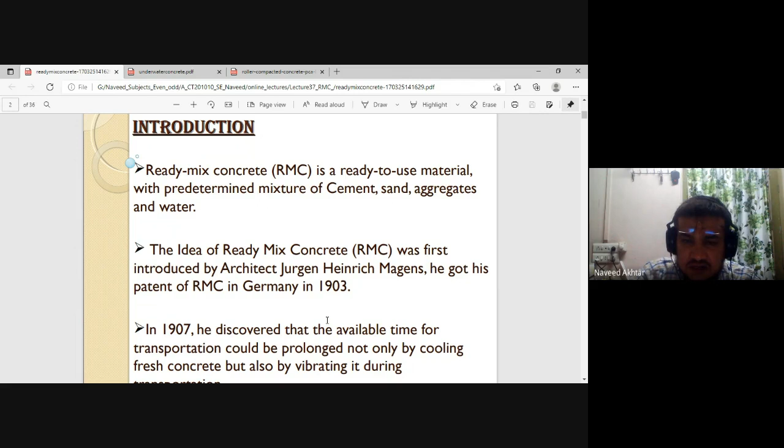Ready to use materials with a predetermined mixture of cement, sand, aggregates, and water. These are mixed at the ready mix plant situated at the factory or some other location, and then we transfer the material through the transit mixer to the site. That is nothing but the ready mix plant. In general terms, you say the RMC plant.

It was first introduced by the architect Jürgen Heinrich Magens. He got his patent of RMC in Germany in 1903.

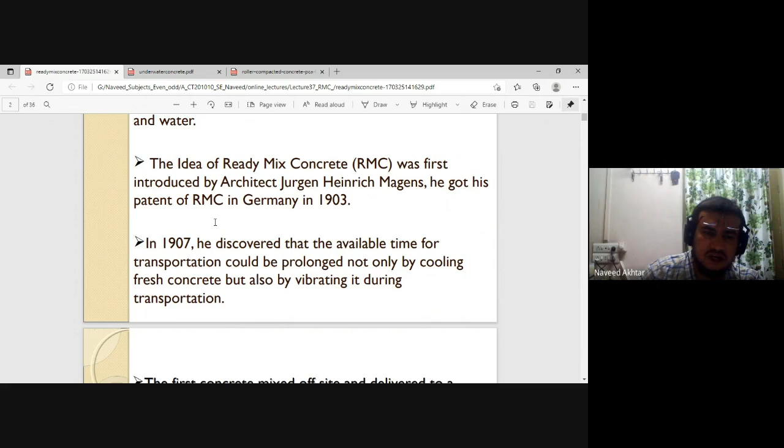In urban areas, in Malegaon also there is an RMC plant. You can also see in our 11,000 houses made on the bank of the river Girna. When we go toward Malde, there are houses, and there is the RMC plant. They are prepared for their continuous use of concrete.

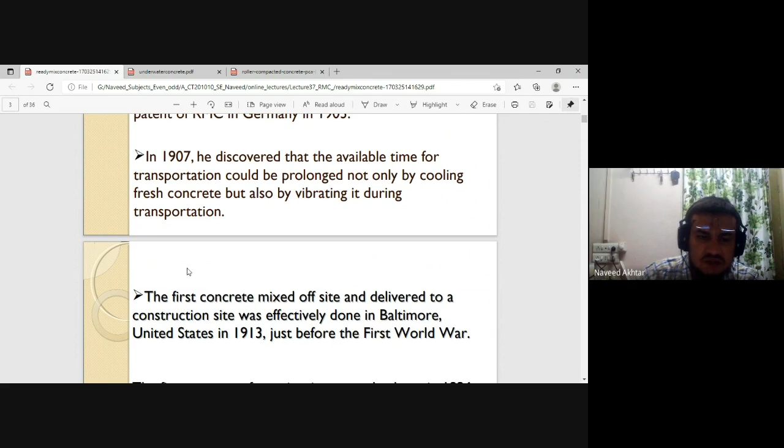In 1907, it was discovered that the available time for transportation could be prolonged not only by cooling fresh concrete but also by vibrating it during transportation. Transferring concrete is a very tough job, because once water is introduced into the mixer, the concrete starts setting. That's why continuous vibration or mixing is required, or a delay in setting time is required for RMC concrete.

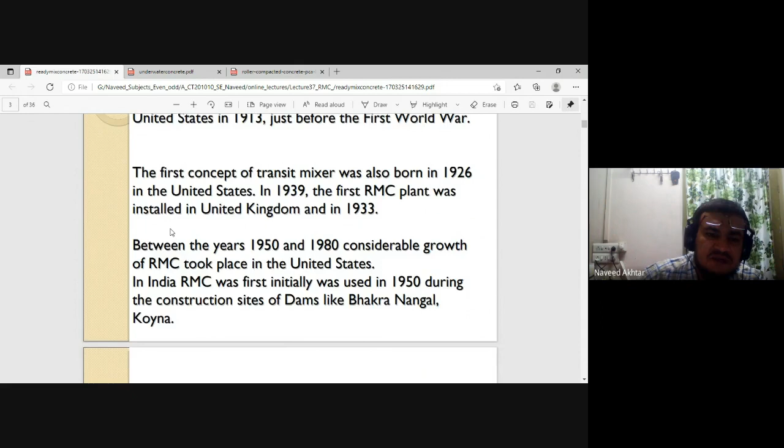Thus, the first concrete mix off-site and delivered to the construction site was effectively done in Baltimore, United States in 1913, just before the First World War. The first concept of the transit mixer was also born in 1926 in the United States. The first RMC plant was installed in the United Kingdom in 1933. Between 1950 and 1980, considerable growth of RMC took place in the United States, and in India, RMC was initially used in 1950 during the construction of dams like Bhakra Nangal, Koyna, etc.

The increasing availability of special transport vehicles supplied by the new and fast-growing automobile industry played a positive role in the development of the RMC industry.

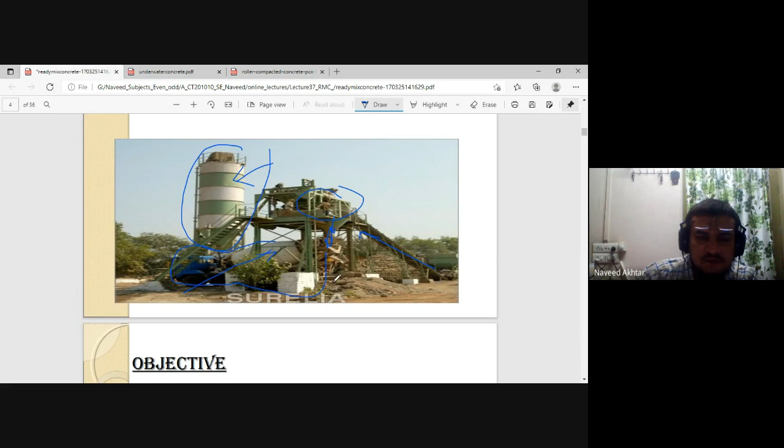So you can see here is the batching plant, and you can see the conveyor belts are there from the hoppers. This is the mixer where all the ingredients are mixed, and then through the hopper it is transferred to the vehicle. You can see this is the mixer vehicle, and this white colored one is your transit mixer. This hopper, the inverted cone hopper, is nothing but storage for your cement. So this is the RMC plant, in general.

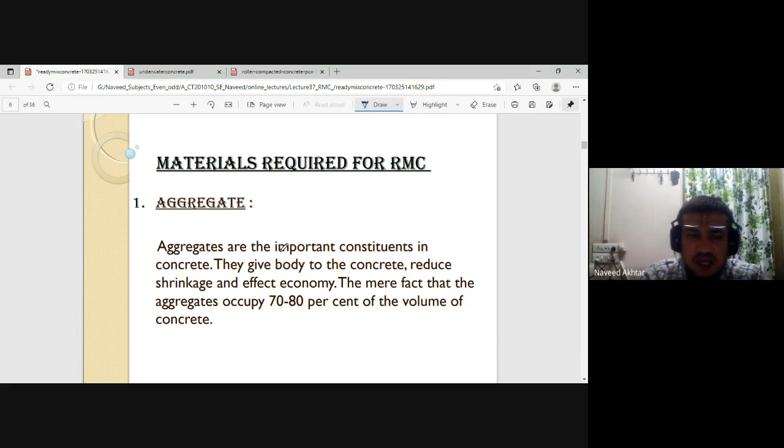To get better quality concrete, to eliminate the storage space for basic material at the site, and also to hire or procure plant and machinery directly, we are taking ready mix concrete from the factory. That's why RMC is given a lot of weightage, because storage of material at the site is required in large quantity when going for concreting. The material required for RMC is generally aggregate, as 70 to 80% of the volume of concrete mass is aggregate.

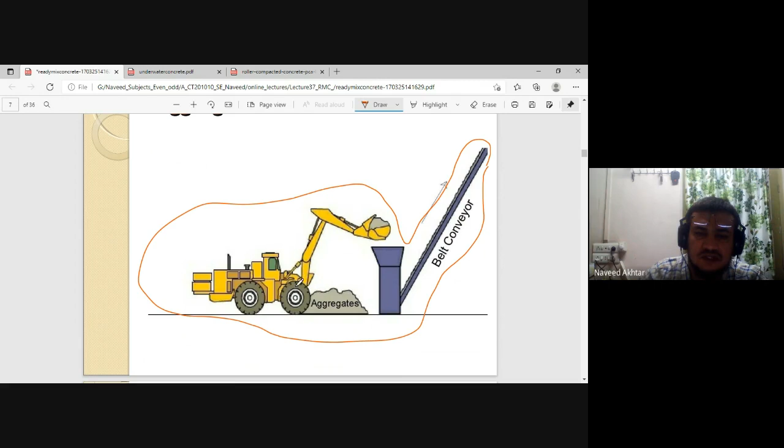This aggregate can be transferred to the conveyor belt to lift it, and then it is sent to the hopper like this. This is the aggregate, and aggregates are divided into two categories: coarse aggregate and fine aggregate. Sometimes, due to the shortage of natural fine aggregate, we are also using manufactured fine aggregate.

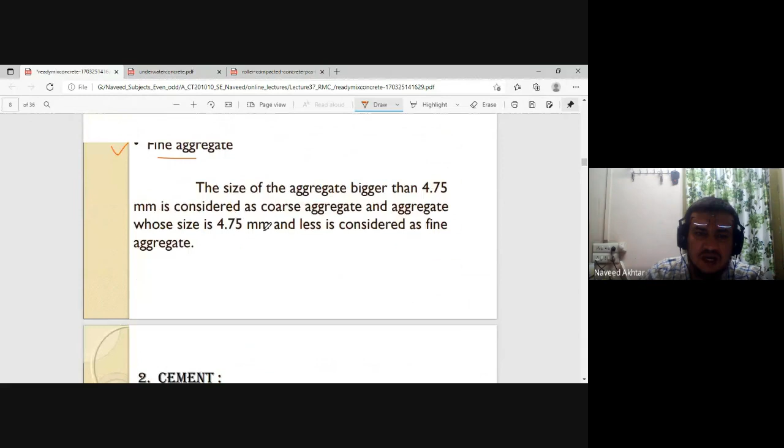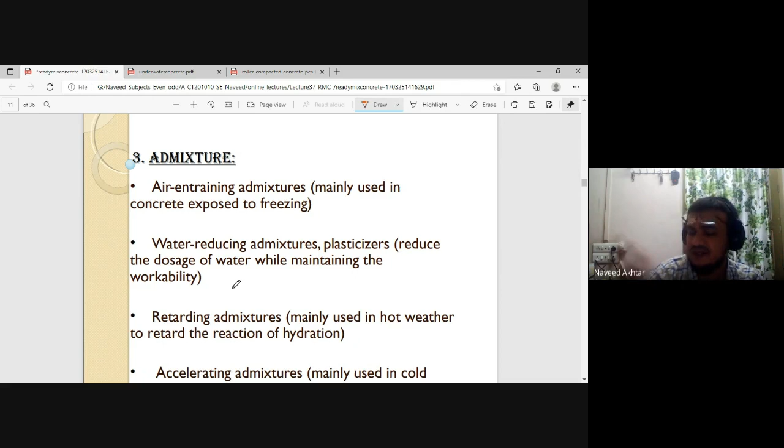Likewise, all the material is supplied to the mixer, and the capacity of the mixer is based on how much concrete it is preparing per hour. If the capacity of the mixer is CP30, it means it is producing 30 cubic meters per hour. Similarly, many such types of plants are there, 15 cubic meters per hour, 60 cubic meters per hour, and many such types.

So these ingredients, the basic ingredients, we have already studied earlier. These are the cementitious materials. Fly ash is also sometimes used because the delayed strength of fly ash is more compared to cement. So early age strength we gain more from OPC cement, but with PPC cement, the cement containing fly ash, or if you are partially replacing cement with fly ash, you also get a good result in later age strength of your concrete.

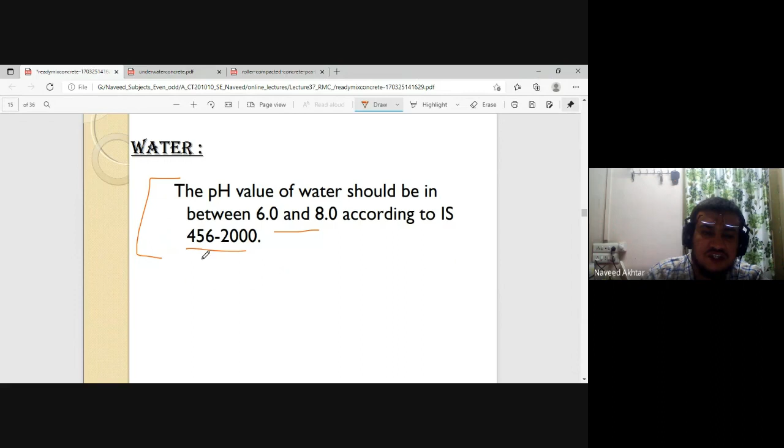Then water is required. The water should have a pH between 6 to 8 according to IS 456, and it should be free from contamination and particulate matter. These are all cementitious materials. Already we studied in unit one, rice husk ash - these are also very fine particles, finer than cement, and they are used to enhance the fresh state and hardened state properties of concrete.

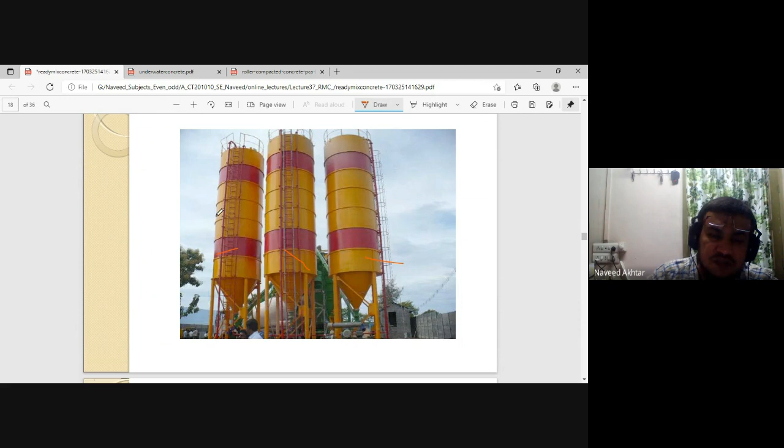So these are the silos where the cementitious materials are stored. You can see silo one, two, three - maybe different types of cement, like RHC rapid hardening cement, low heat cement, ordinary Portland cement, and Portland Pozzolana cement. So different hoppers are there for different cementitious materials. Sometimes if you are using fly ash as cement replacement, you can use that hopper, and through this hopper, the material is supplied through pipes to the mixer.

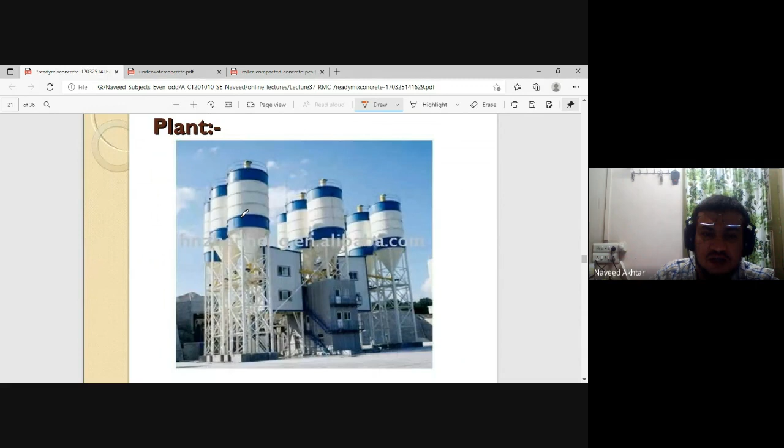So all these show how the aggregate is supplied, through the conveyor belt, then mixing takes place, and then transportation is done. There are many such batching plants - manual batching plants, somewhere semi-automatic batching plants, and automatic batching plants. These are different types of batching plants used for the ready mix production of RMC, that is ready mix concrete.

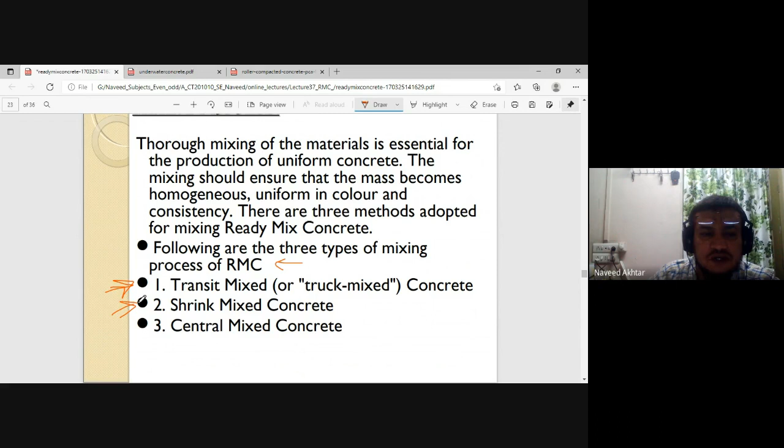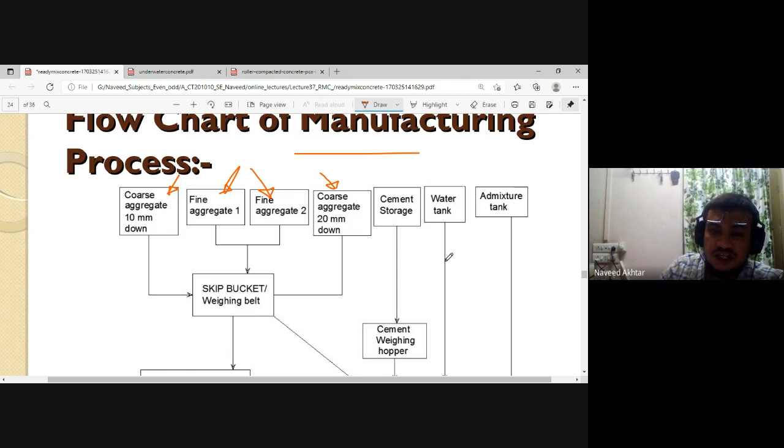Here it is very clear that the coarse aggregate and fine aggregate are stockpiled. Stockpile one, the coarse aggregate; stockpile two is divided into two parts, fine aggregate one and fine aggregate two. Then coarse aggregate also has another stockpile with 20mm and less than 20mm aggregate, and cement storage. Also the water tank and admixture storage are there, and then all this material is supplied to the mixer for mixing of the concrete, and the ready mix concrete is ready for discharge into the transit mixer to be transported to the construction site.

So then, for the fresh concrete, a sample is taken for testing, for the compressive strength test. See how the mixing process is done.

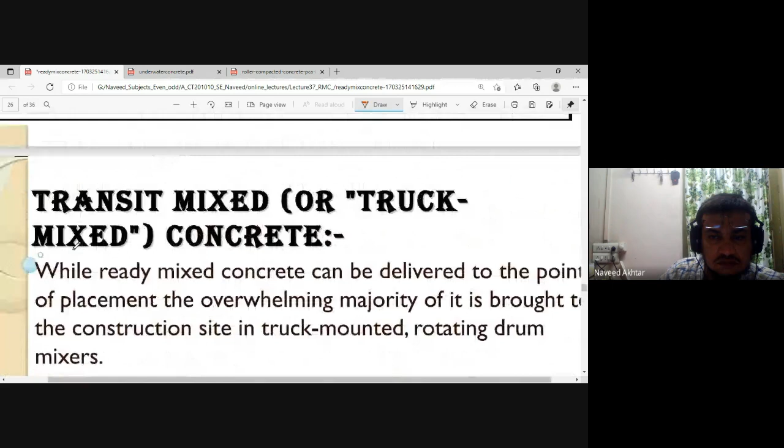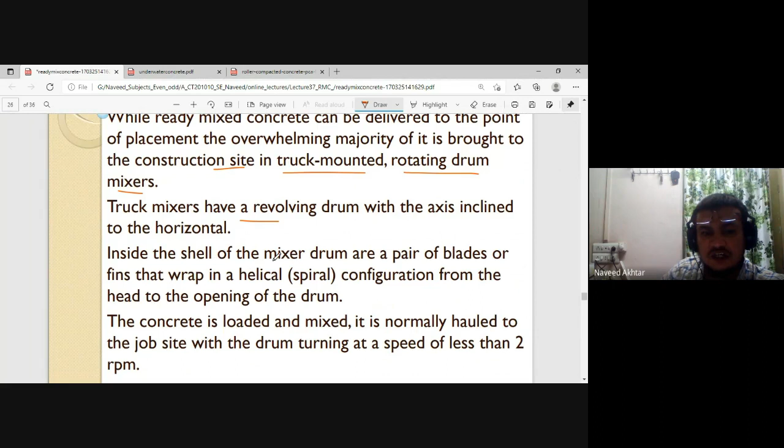While the ready-mix concrete is delivered to the point of placement, the overwhelming majority of it is brought to the construction site in a truck-mounted rotating drum mixer, and that rotating drum mixer is called a truck mixer, also called a transit mixer. Inside the shell of the mixer drum are a pair of blades that rotate, and the mixing of concrete is done. So you can see this is the truck mixer, the transit mixer, also called the transit mixer.

So this drum rotates clockwise and anti-clockwise. If it rotates clockwise, it is doing the mixing, and if it rotates anti-clockwise, it will discharge the concrete through the chute.

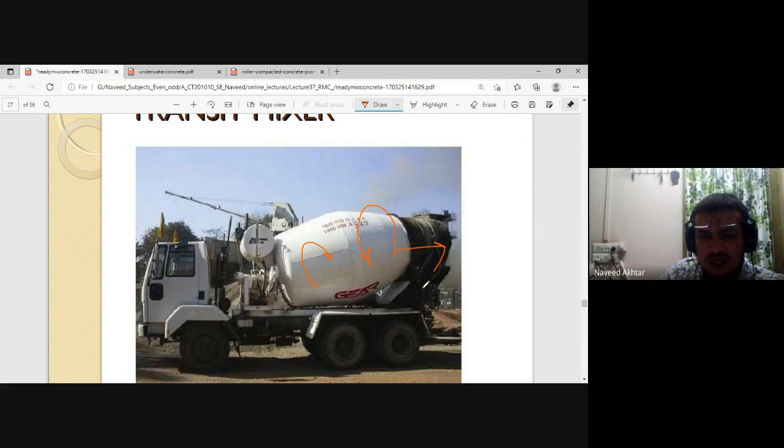So likewise, you can see this is RMC, ready-mix concrete, produced and transferred to the site.

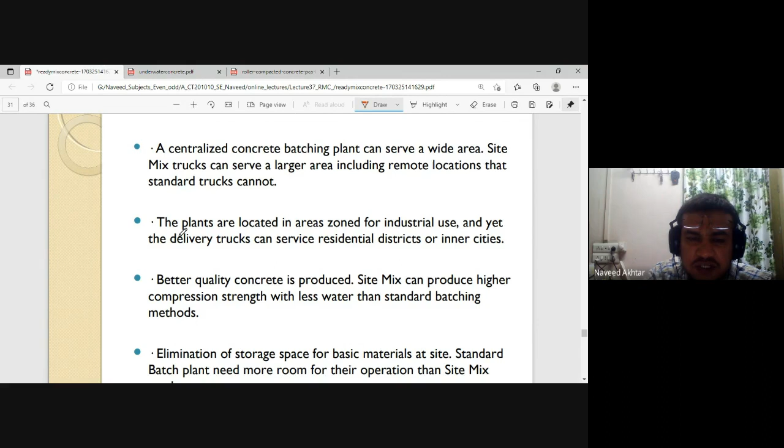Better concrete is produced; site mixing can produce higher compression strength with less water than standard batching methods. Elimination of storage space for basic materials at site. Standard batching plants need more room for their operation than site mix trucks. So these are the merits and benefits of RMC concrete.

Okay, very poor attendance today.

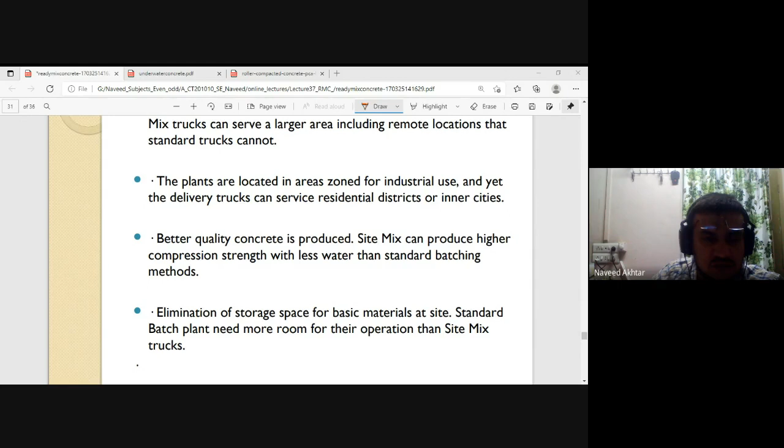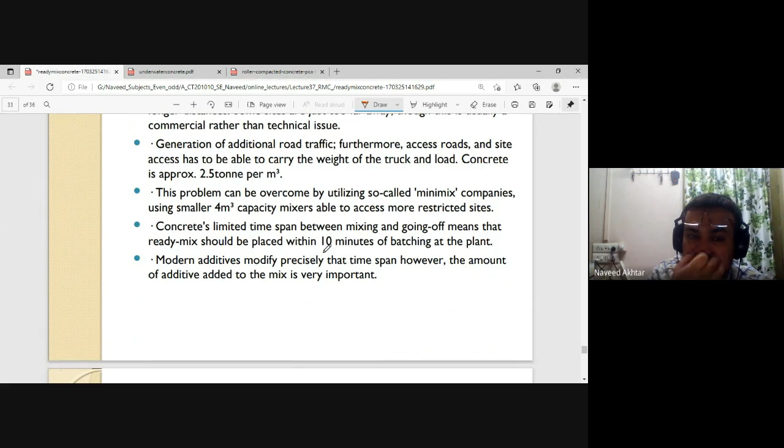Generation of additional road traffic. Furthermore, access roads and site accessibility have to be able to carry the weight of the truck and load. Concrete is approximately 2.5 tons per cubic meter, so that is a problem. If there is traffic, it should be discharged on time, otherwise it will be harmful for the truck, and the concrete is wasted.

The concrete's limited time span between mixing and going off means ready mix should be placed within 10 minutes of batching at the plant. So it is a very short time nowadays. If you are using a retarder, then 30 or sometimes 40 minutes is also suitable, and modern additives modify the time span precisely. However, the amount of additive mixed is very important.

This is all about your RMC plant, that is ready mix concrete.

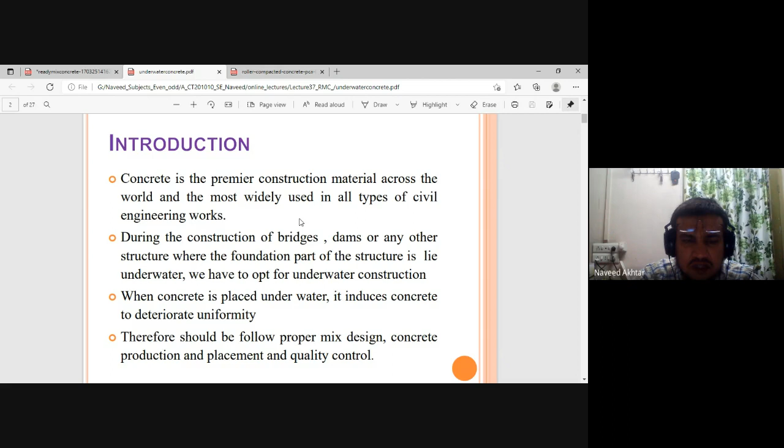Now the second technique is underwater concreting, a special condition where concreting can be done in water. Concrete is the premier construction material across the world, and is mostly used in all types of civil engineering works after water. So during the construction of bridges, dams, or any other structure where the foundation part lies underwater, we have to opt for underwater construction or underwater concreting.

When concrete is placed underwater, it reduces uniformity of the concrete. Therefore, proper mix design, concrete production and placement, and quality control is required very rigorously, because concreting underwater will hamper the properties of your concrete.

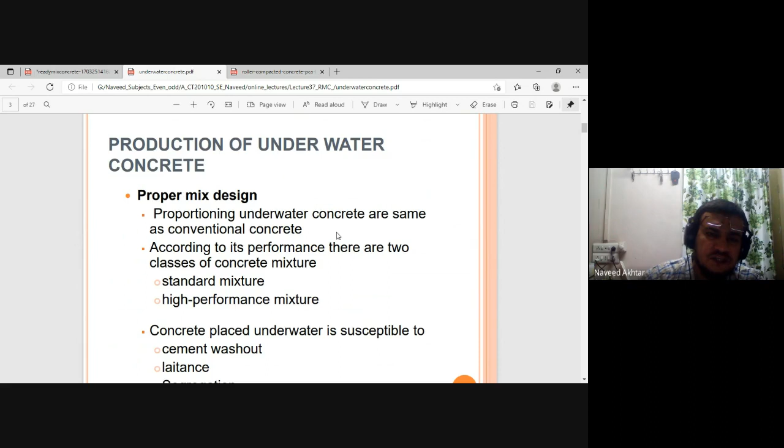So proper mix design should be done, and when placing concrete underwater, it may be susceptible to cement washout, laitance, or segregation. All these effects may occur, and should be avoided when doing concreting underwater.

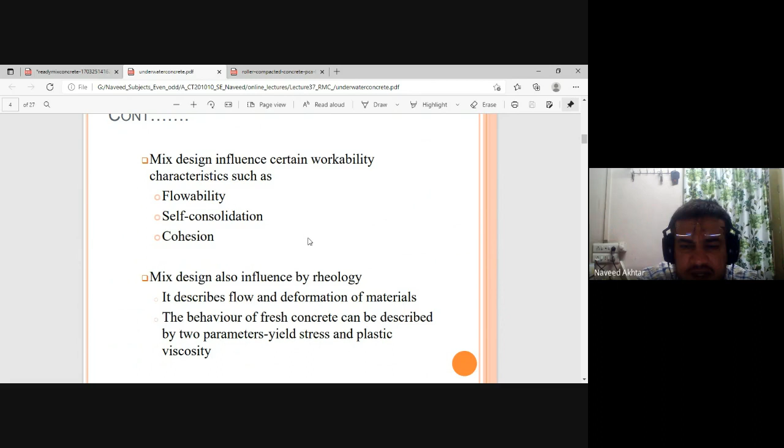Mix design influences certain characteristics such as flowability, self-consolidation, cohesion, etc. Mix design is also influenced by rheology. Rheology means the workability properties of the material; it describes the flow and deformation of material. The behavior of fresh concrete can be described by two parameters: yield stress and plastic viscosity.

Water content is an important factor affecting the rheology of concrete. Water content in a mixture can be classified into two categories: water absorbed in the aggregate and free water.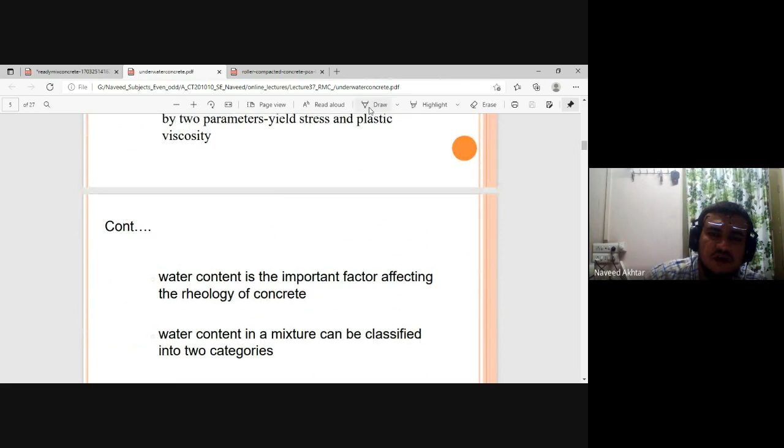There are many methods of placing concrete underwater. The first one is the Tremie method, then the pump method for pumping concrete - we have seen pumps in the equipment part in the previous class - and toggle bags or bag work. These are the different methods to place concrete underwater.

Tremie is a watertight pipe, generally of 250 mm diameter, with a funnel-shaped hopper at the top upper end, and a loose plug at the bottom where the concrete is deposited. It is supported on a working platform above the water level, and through it the concreting is done.

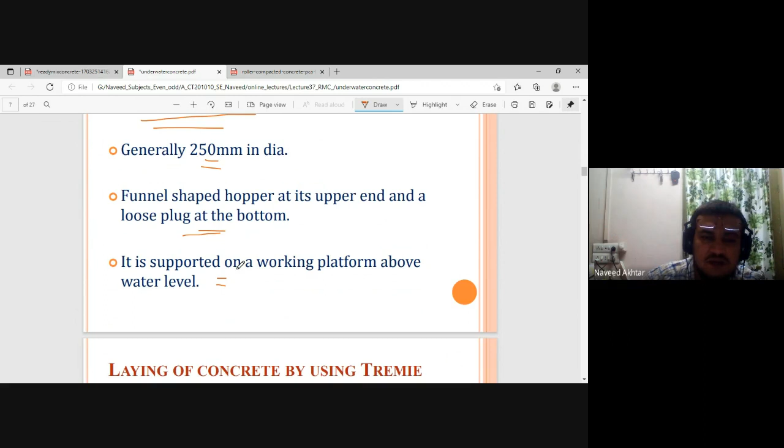So this laying of concrete is nothing but the Tremie method. The pump method, you know, by pumping through the boom, you can access the site.

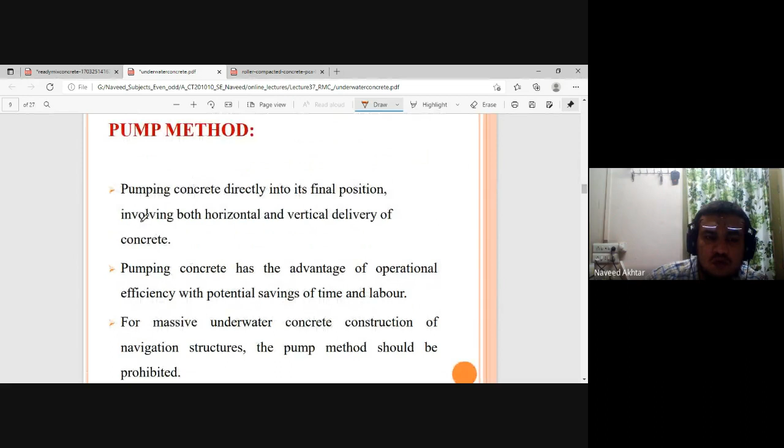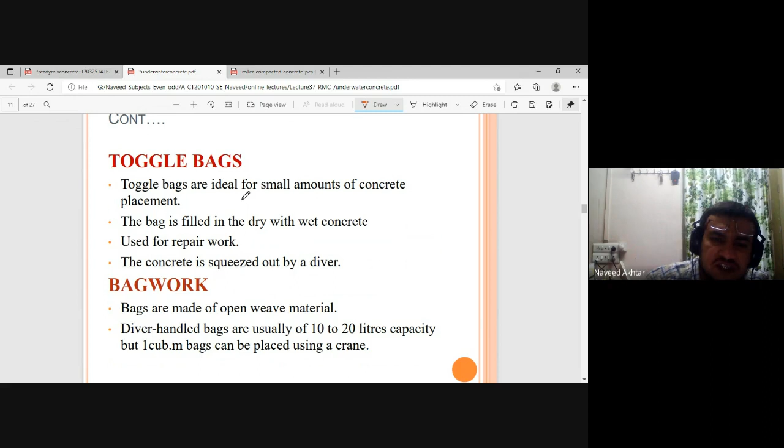Then toggle bags are ideal for a small amount of concrete placement. This bag is filled in the dry with wet concrete, used for repair work. The concrete is squeezed out by a diver. So that is nothing but the bag filled with wet concrete. It is placed at the site where you are to drop it, and the diver will open it and the concrete is placed.

Bags are made of an open weave material. A diver can handle bags of usually 10 to 20 liters capacity, but a 1 cubic meter bag can be placed using a crane. If you're using a crane, you can place bags of 1 cubic meter, but if placing by diver, only 10 to 20 liter capacity can be done, and that will require a large amount of time.

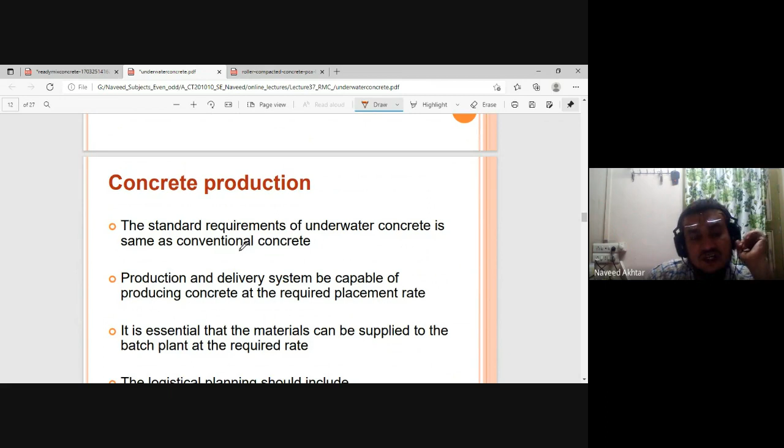So these are all about concreting underwater and the process. The standard requirement of underwater concrete is the same as conventional concrete production and delivery system, but our IS code says that if you are doing underwater concrete, you have to increase the cement content by 10%. So that should be kept in mind if you are doing underwater concrete.

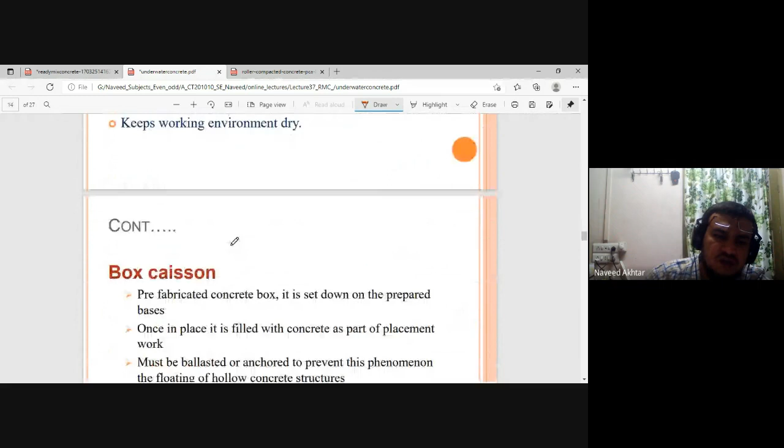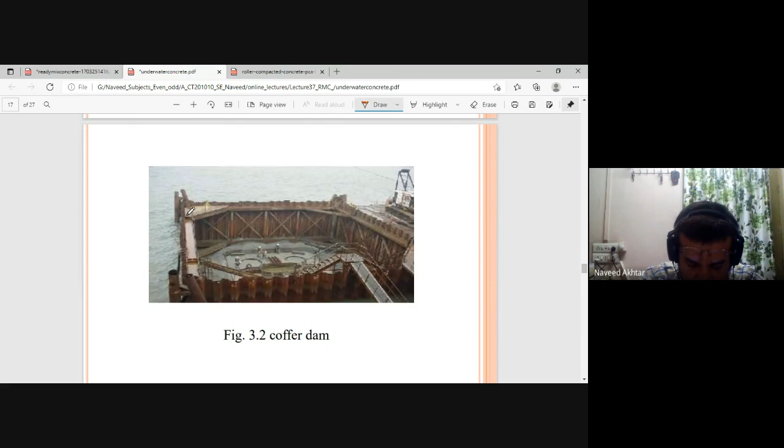Now the another technique we can go for today is roller compacted concrete, RCC. Roller compacted concrete consists of Portland cement, coarse and fine aggregate, and water. The mixture is the same, but RCC requires no forms, finishing, steel reinforcement, or joint sawing, because there are no forms.

Generally the compressive strength of RCC is more than M40 or M50 grade of concrete, and they are generally used for road construction, or for mass concrete on dams, etc. The roller compacted concretes are used for this.

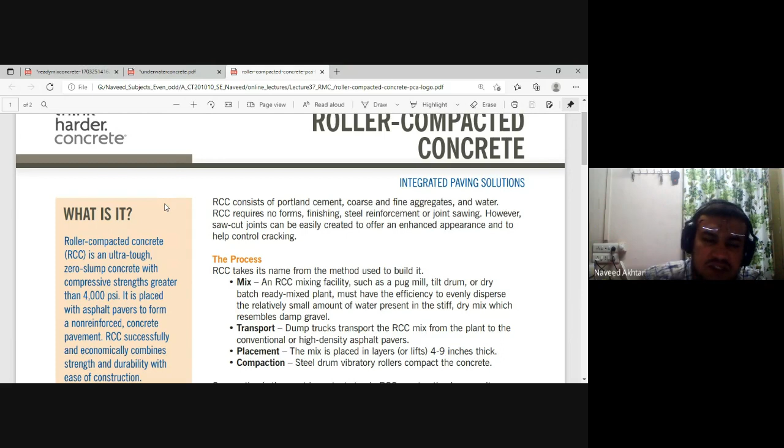So roller compacted concrete takes its name from the method used to build the mix. RCC mixing facility, such as the pug mill, tilt drum, or dry batch ready mix plants, must have the efficiency to evenly disperse the relatively small amount of water present in the stiff and dry mix.

So that is the dry mixing, or very stiff mix for roller compacted concrete, and that should be managed. Transportation is through dump trucks at the site from the plant to conventional high density asphalt pavers, etc., which we use for road construction. Then for placement, the mix is placed in layers 4 to 9 inches thick, and compaction is done by steel drum vibratory rollers compacting the concrete.

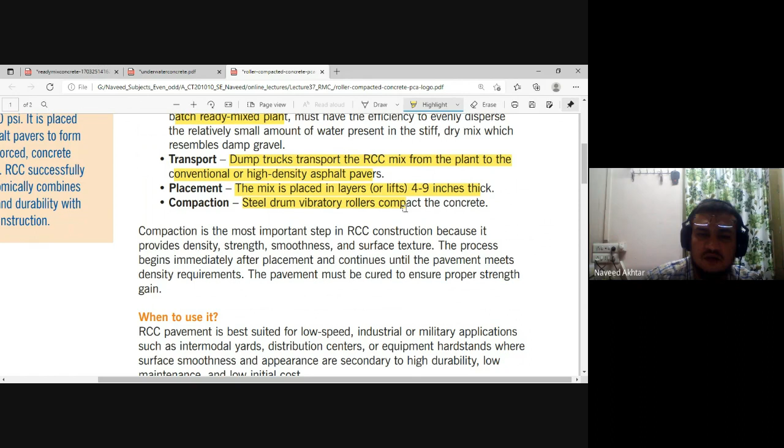So generally you can see large heavy equipment is needed for placing and compacting roller compacted concrete. You can see this machinery we have also seen in our areas, working where concrete road production or construction work is going on.

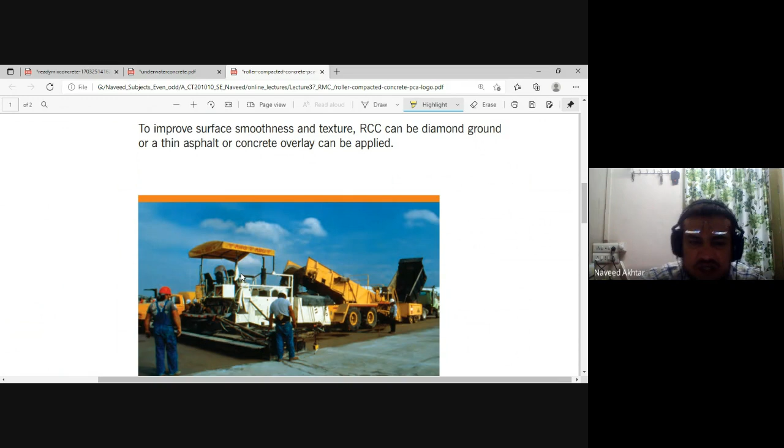Generally in the Nandgaon area, the concrete work is going on, and also here in our Malegaon Old Agra Road, the concrete road construction is going on. You can go and watch live how the construction is done, and that is not roller compacted concrete, but in some parts where a large mass of concrete is needed and high strength concrete, or high performance concrete, is required, then at that place you need it.

Compaction is the most important step in RCC, that is roller compacted concrete, because it provides density, strength, smoothness, and surface texture. The process begins immediately after placement and continues until the pavement meets density requirements. The pavement must also be cured to ensure proper strength gain. These are the different conditions where we use roller compacted concrete.

RCC pavement is best suited for low speed industrial or military applications such as intermodal yards, distribution centers, or equipment hard stands, where surface smoothness and appearance are secondary to high durability, low maintenance, and low initial cost.

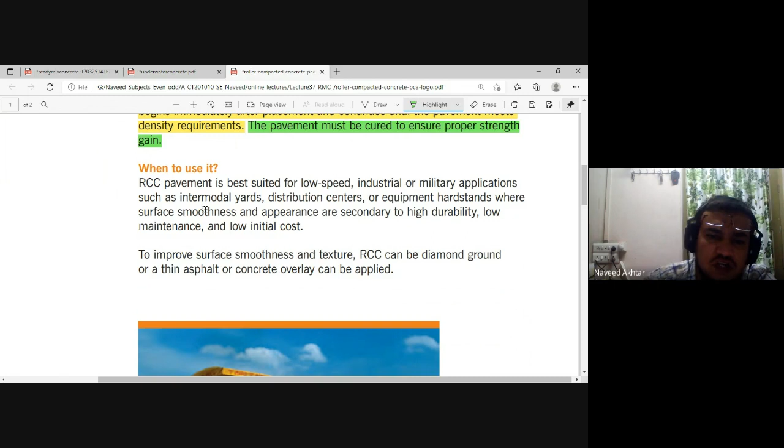To improve surface smoothness and texture, the RCC can be diamond ground, or a thin asphalt or concrete overlay can be applied.

Streets for local roads in our area are also being constructed this way. If you go to a highway where concrete road construction is going on, you can see the compaction is done through rollers when large quantities are involved. It is also used for dams, high volume intersection roads, industrial access roads, parking lots, highway shoulders, airport aprons, and taxiways. These are generally the uses of RCC, roller compacted concrete.

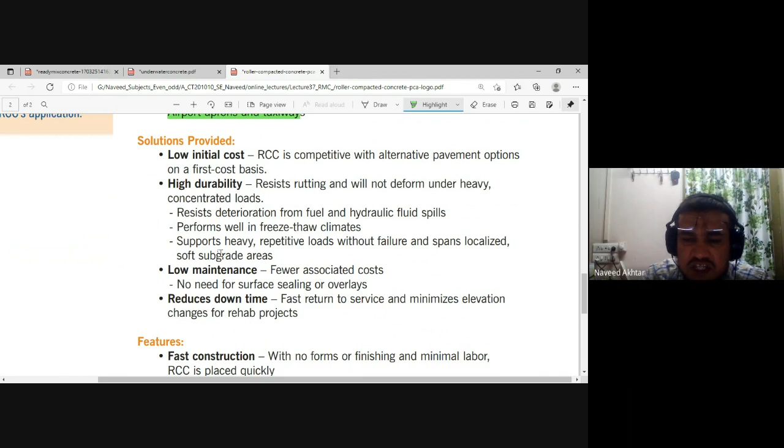RCC offers low initial cost with a highly durable structure, and low maintenance because of that high durability. There's no need for surface sealing or overlays. It reduces downtime, allows fast return to service, and minimizes elevation changes for rehabilitation projects.

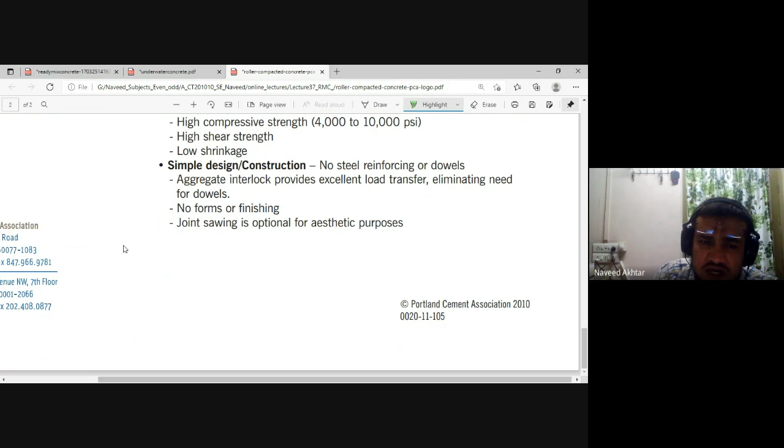The features include fast construction with no forms or finishing, and minimum labor required, since compaction and placing are done with equipment. This makes construction fast. Lighter surfaces reduce urban heat island effect and lighting requirements for parking and other exposure. RCC has very strong compressive strength and simple design, and aggregate interlock provides excellent load transfer, eliminating the need for dowels. No forms or finishing are required, and joint sawing is optional, only for aesthetic purposes. These are all the benefits of roller compacted concrete.

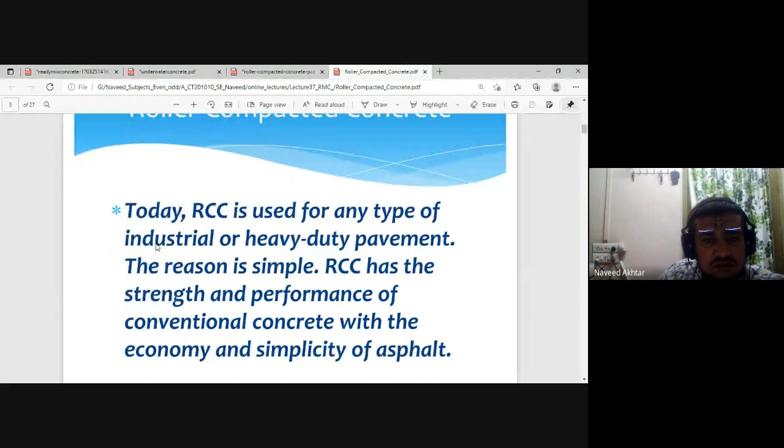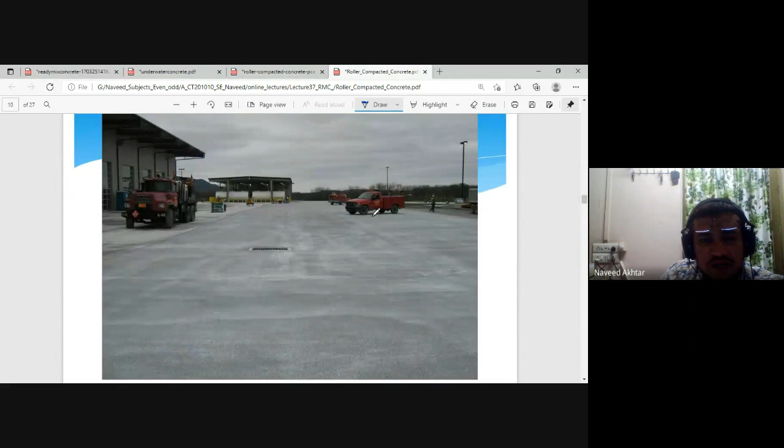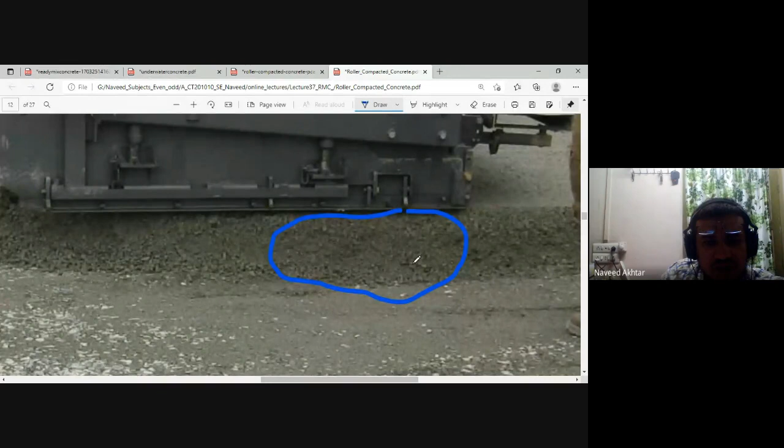You can see how dry the concrete is. Very minimal moisture is there, but the mixing should be good. You can see this very dry concrete.

Then this is transferred to the compactor and finisher, which will compact it and transfer it to the road. You can see here the wet road and here the dry road, and the production work going on through the machinery. This is all about roller compacted concrete, RCC.

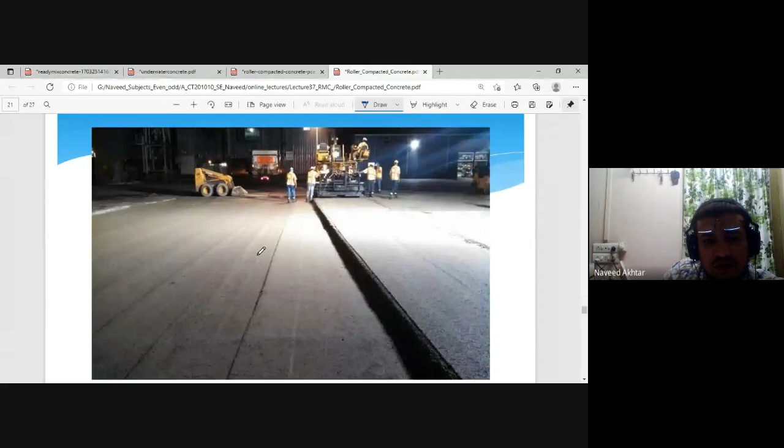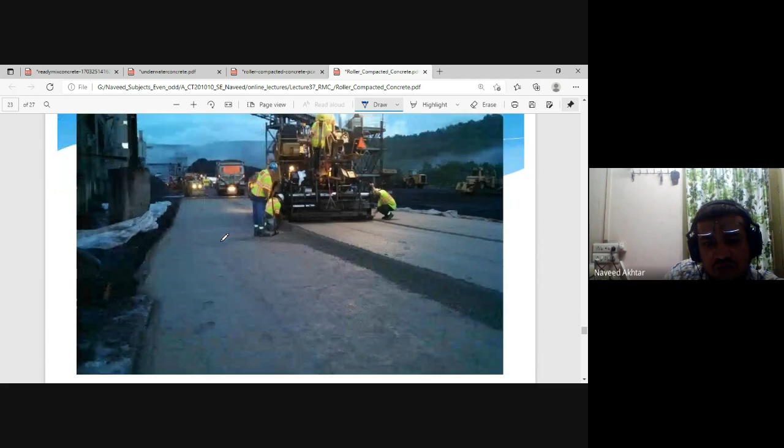See here the layers for industrial flooring, done using roller compacted concrete. This machine levels and compacts the concrete. Here also you can see the roller compaction being done, the machine leveling the road truck with concrete, and the roller in action. So these are all about roller compacted concrete.

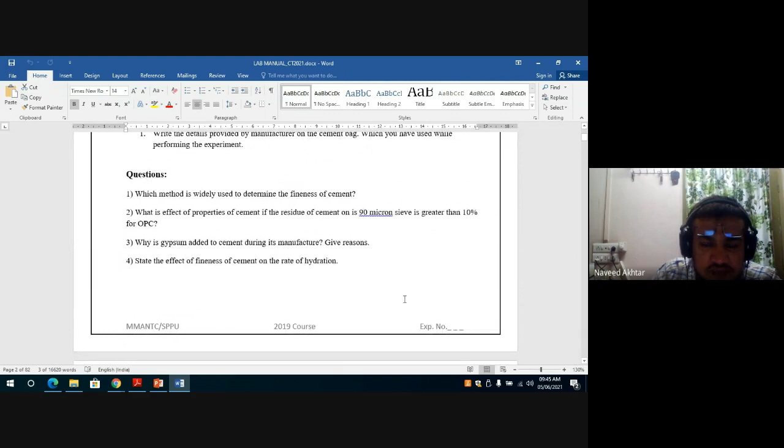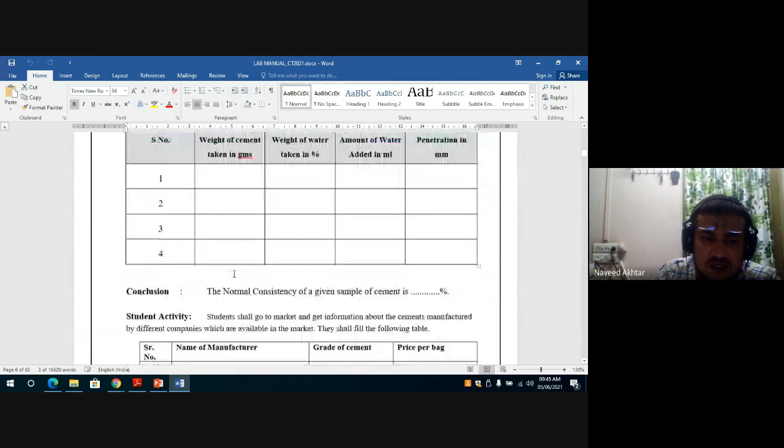You have to study these codes, study the experiments properly, each procedure, and the theory behind the experiment. Also the question answers, whatever given, and whatever student activities are given, you have to perform, and based on that, the questions are there on your examination.

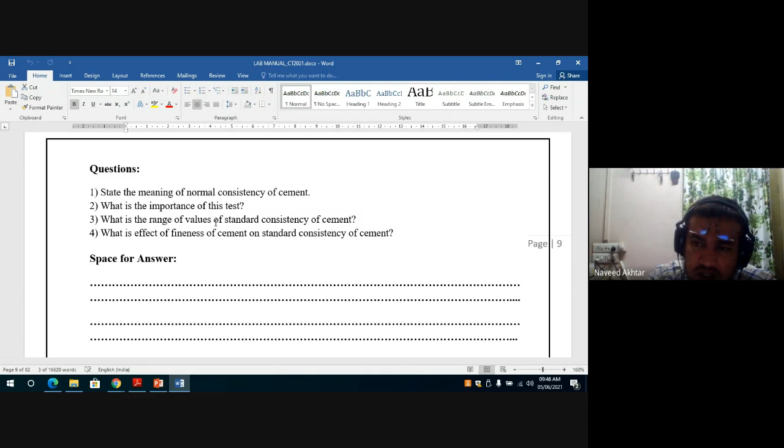If some students are asking about how the examination will be conducted: it will be based on a quiz, and the quiz has two parts. Part A is based on the test on cement and test on filler material aggregate, and part two is the test on concrete, which starts from experiment number 13.

This mix design method is already covered in the classroom, step by step procedure for the DOE method, and that I will just show you. It remains only for me to show you how to convert it in the spreadsheet.

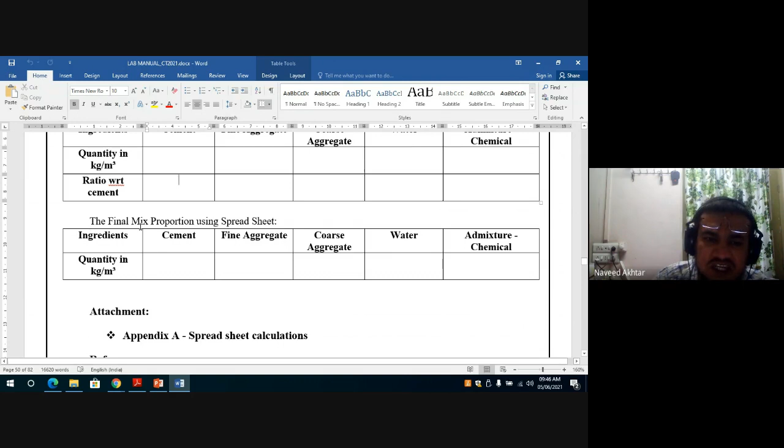Whatever mix design you have done should be written with its ingredients, and you have to make a spreadsheet, then write down the final mix proportion that comes from the ingredients, and compare it in Appendix A. You have to attach the mix proportion by the spreadsheet.

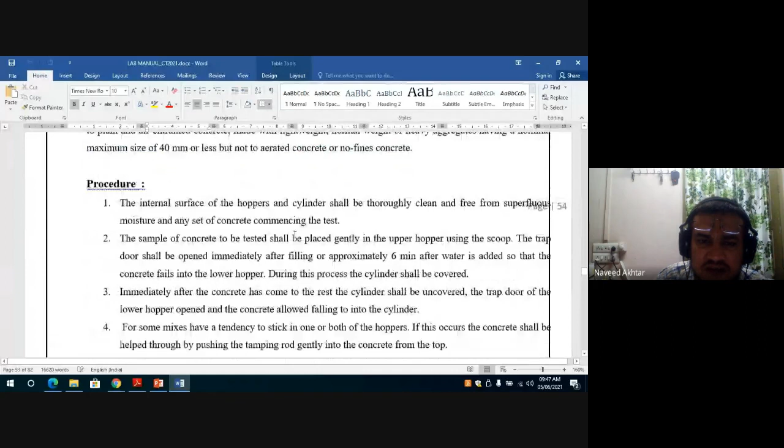Then the determination of consistency of concrete, that is slump, the workability test in experiment number 4. All these tests are given as A, B, C. Part B is for the compaction factor test, and part C is for the VB consistometer test. All the apparatus and details you can see here, and many question and answers are also here. Based on all these experiments, you have to study, and the MCQ questions will be there on the quiz.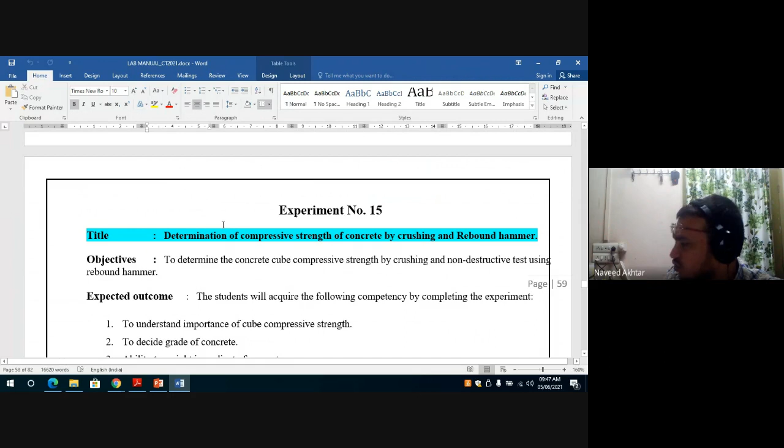Experiment number 15: determination of compressive strength of concrete by crushing and rebound hammer. Here also expected outcome, apparatus, theory, and significance, what is NDT, and how to find out the rebound number, and from the rebound number how to find the strength of concrete in Newton per mm square from this graph. And if compression testing is there, how you can test on the compression testing machine.

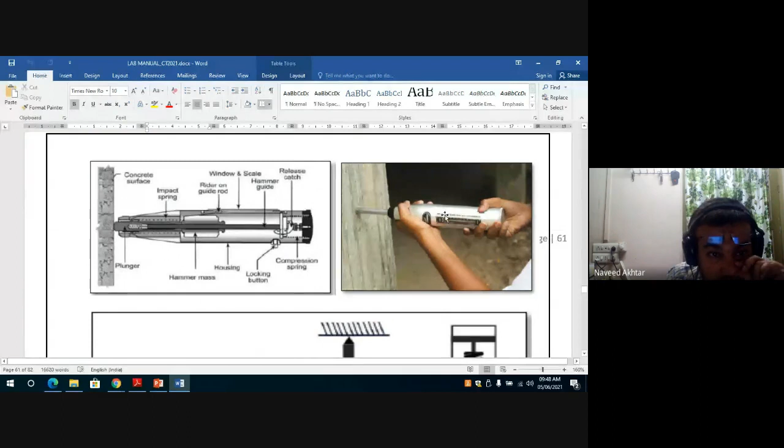This is the rebound hammer, how to hold it and how to do the test. You can see in the photograph, also different positions of the hammer, and this shows the working of the rebound hammer when you measure the surface hardness.

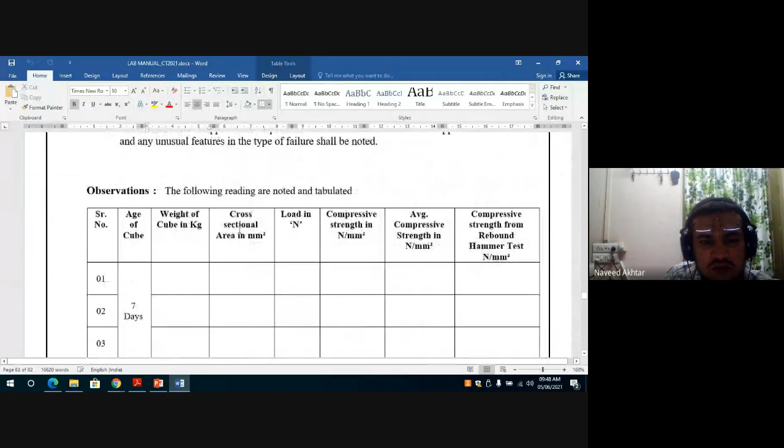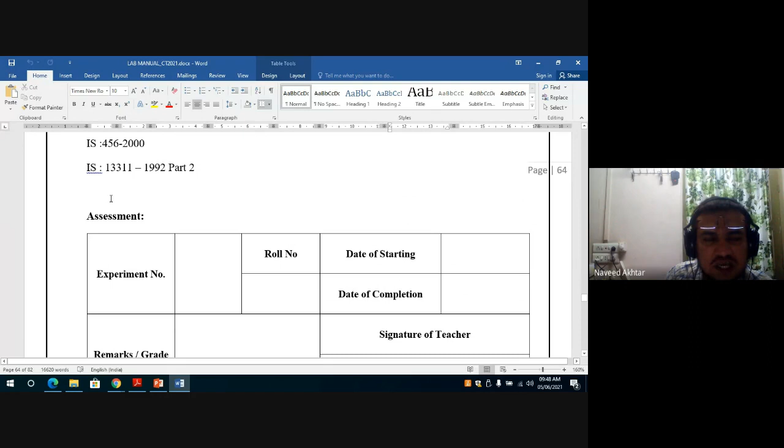You get the rebound number, and then you have to fill the observation table. Compressive strength you are finding out in 7 days by the rebound hammer and by the compression testing machine, that should be written down. The references for this are IS 456 2000, IS 516, and IS 13311. So all these experiments you have to cover.

Then the determination of indirect tensile strength of concrete, that is splitting tensile strength, and the flexural strength of hardened concrete can be done. Let me show you here.

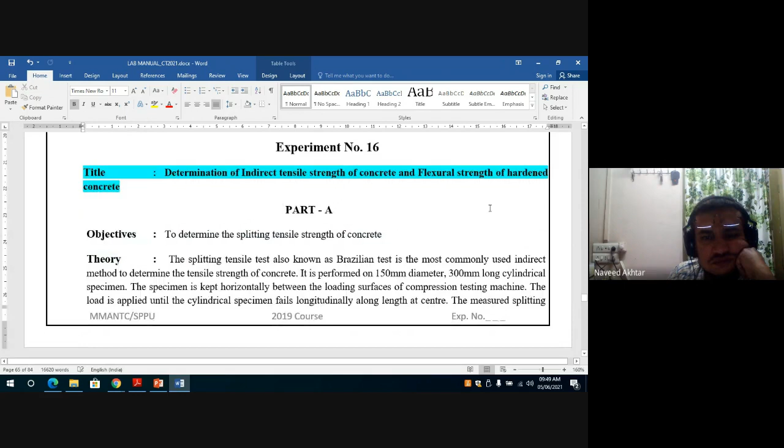This formula is to find out the tensile strength by indirect method, the split tensile strength. You can see here the setup where the cylinder is put in horizontal position to find out the splitting tensile strength of concrete.

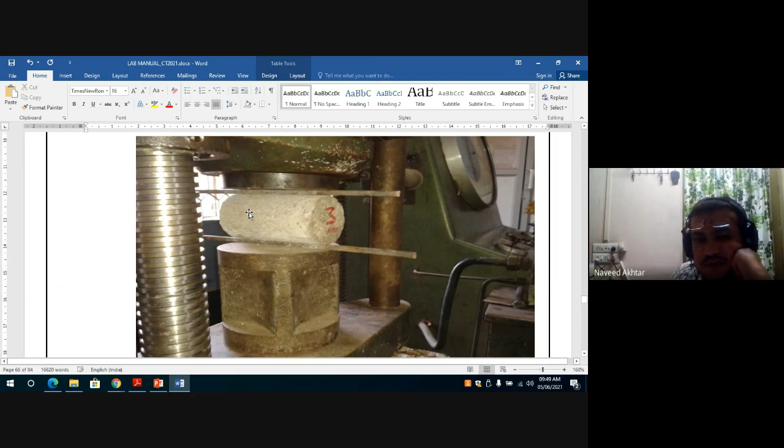The procedure and all this description is given in the manual. Then you have to fill the observation table and do the calculation, and you can find out the result. Then the flexural resistance setup, you can see here how the setup of the flexural resistance testing of the concrete looks.

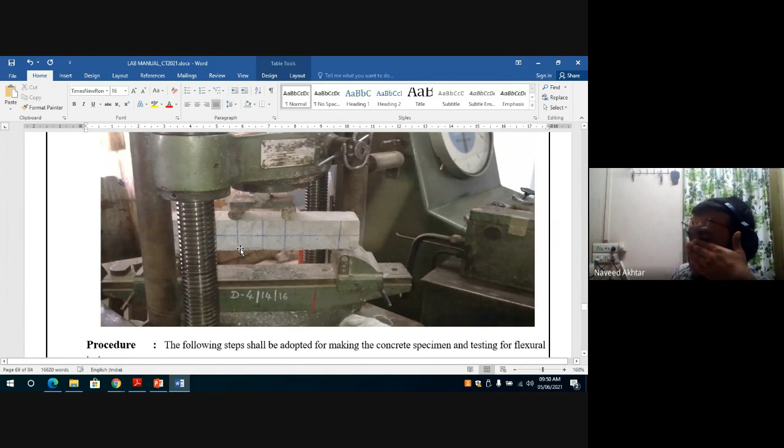The following steps can be performed for the flexural strength test. The flexural strength is generally found out on a beam of size 150 by 150 by 700, or 100 by 100 by 500, depending on which size of beam you are using, and that also gives you the flexural strength of your concrete. This is the observation table, and calculation and conclusion you can do.

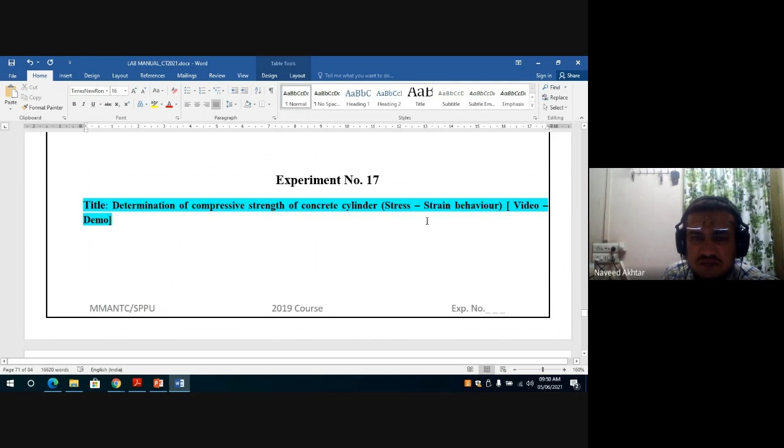Then experiment number 17 is the demo experiment for stress strain behavior, that is a video demo. And the last one, we will see the experiment demonstration video on how to perform the ultrasonic pulse velocity test. So these are the demonstrations you can see.

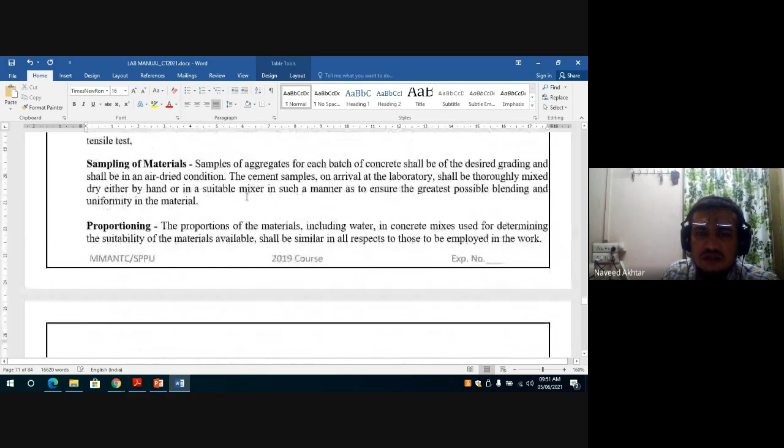So already most of the experiments are over. You have seen the videos already, and I also shared them with you. You can see them, and later on, physically, you can perform them when you go for the project work. So we will stop here today, and best of luck for your examination. Prepare well and do a good job.